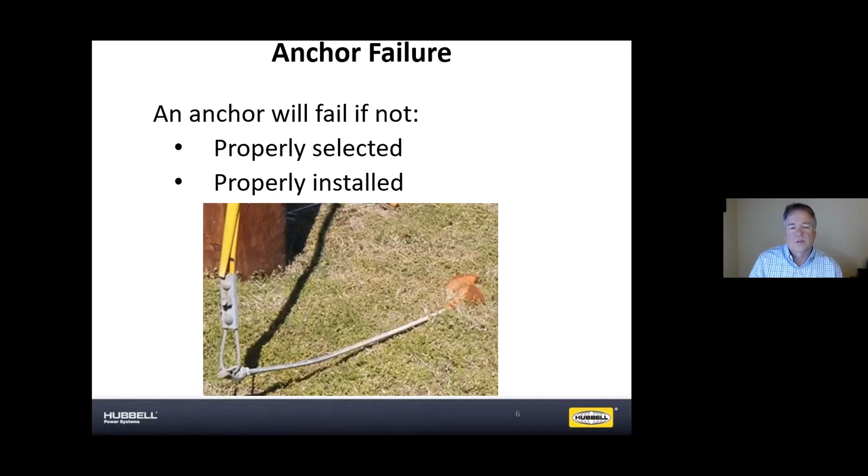All right, so the RUS standards. There are a number of different standards out there. This is the last one I've seen, and I don't think it's been changed since I last checked late last year. There are some holding capacities shown in the charts. I wanted to point out that those capacities are not the maximum the anchor is going to hold, but the design loads - what you expect to have that anchor at when the whole system's in use and in place.

So there's a couple different anchors there - an expanding anchor, the screw anchor. I'll walk through some of the different families of anchors, but I wanted to point out the note at the bottom, because this is what gets some people in trouble: it assumes these capacities are on a class 5 soil. And if you look at the RUS standards, there is a listing.

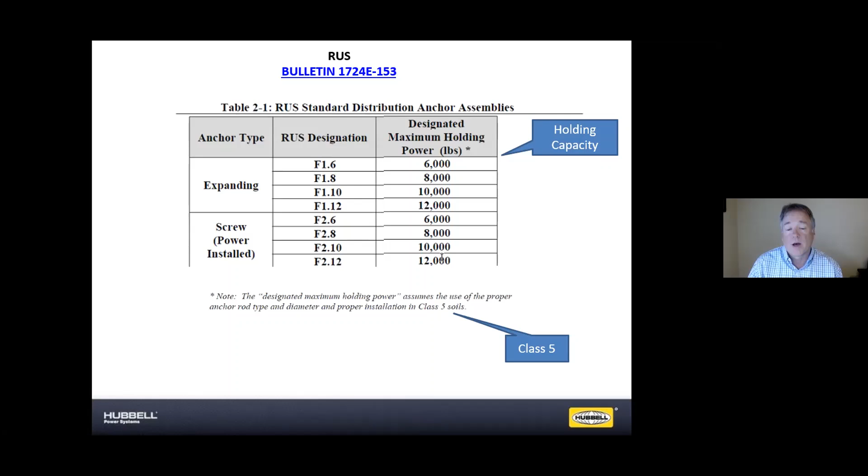Let me go back one. So you see the values here - these are the standard ratings for the different types of anchors. You can see numbers like 6,000, 8,000, 10,000, 12,000. They're asking you to derate them when you get into softer soil, so you're talking about really not a whole lot of capacity there. So there's the derating values and the soil classes.

So let me walk through some of the families here. The first family of anchors is the expanding anchor. It's been around since the 1940s - it's been a very good anchor, works well. You can see the holding capacity we show for the different size anchors. The anchors are sized based on the size of the hole they're supposed to be installed in, and most common is the 8-inch. It's by far the highest volume, and it's supposed to be installed with an 8-inch anchor auger, as we call it - a fairly short auger.

The crews I've been with would normally have their pole auger, and to install this anchor correctly they'd have a second auger that's about the size of the anchor, either 8-inch or 10-inch. We have a 10-inch on our truck.

The way they're installed is you auger the hole in line with the guy. You install the anchor, and you can see there's a cone, and underneath - a little bit harder to see - there's a base. After the anchor rod is installed through the cone and the base, you put the nut on the back side. You clip the wires that hold the base and the top together, and then the anchor is installed. Then there's a tamping bar, a busting bar as we call it, used to bust that cone out into the sides of the hole. That's where the real strength of the anchor comes from - having that hole about the same size as the anchor, having the proper size hole.

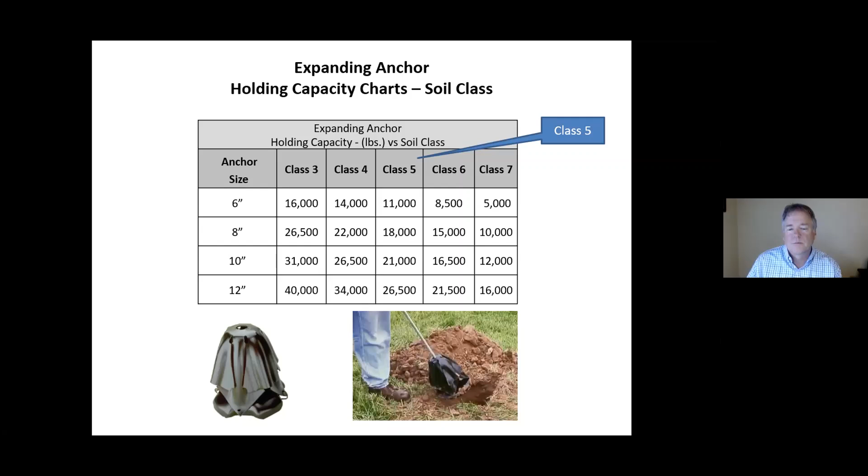So the next family of anchors I was going to talk about are the screw anchors. I'm sure most people are familiar, but I'm never quite sure who's going to be participating in a seminar. So we're talking about the type of anchors that are installed with the truck.

Some people call that the Kelly bar too. But in either case, the whole idea is to get the torque from the torque motor transmitted all the way down to the anchor, and not try to put the torque through the anchor rod itself, because the anchor rod will twist up.

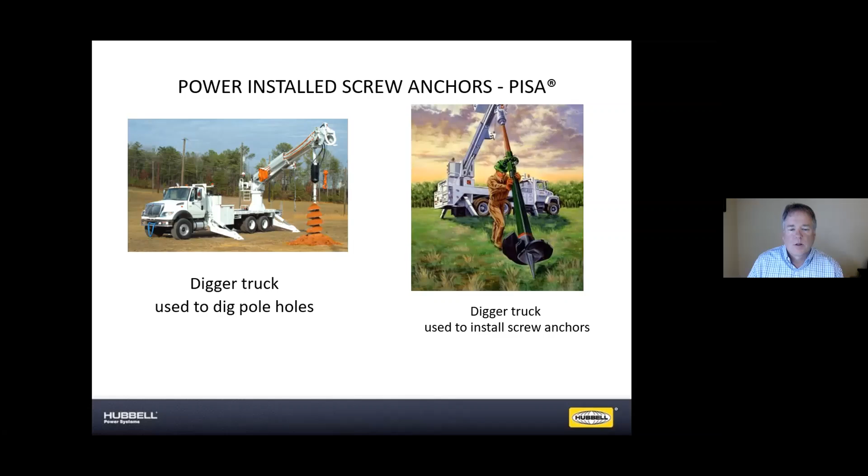When you install an anchor and the bar breaks, you know it - the crews know it, it pops. It's one of those things where if you have harder soils, some utilities are moving to the socket style. And the idea on the socket style is that...

the square wrench fits inside the socket, so there's a lot more bearing capacity from the socket onto the square bar. The torque capacity, the amount of torque the truck can put on the anchor before it breaks, is a lot higher with the socket style. They're more expensive, but it's one of those things - if the bar hub type works for you, economically it's the best. But if you're having trouble with crews hitting rocks, or even in the middle of summer when the ground's really dry, just getting through the first couple feet can be some pretty tough digging.

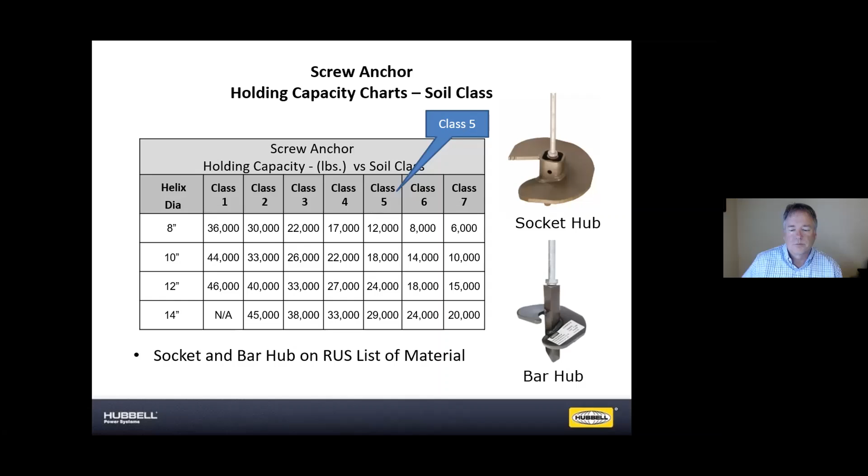The key to these screw anchors is the torque. As we talked about originally with the bust anchor, you're digging up the soil and disturbing it. The key with screw anchors is that they do not disturb the soil. You can slice them down through the top layer and get into firm soil, and the torque required to install them provides a way to measure capacity. There are indicators and tools available to measure torque.

Honestly, there's not a lot of people measuring torque for just a distribution anchor with a single helix. But when you get into the bigger anchors I'll talk about, the multi-helix anchors, it's real common for people to use a torque indicator. So I'll talk about those as well.

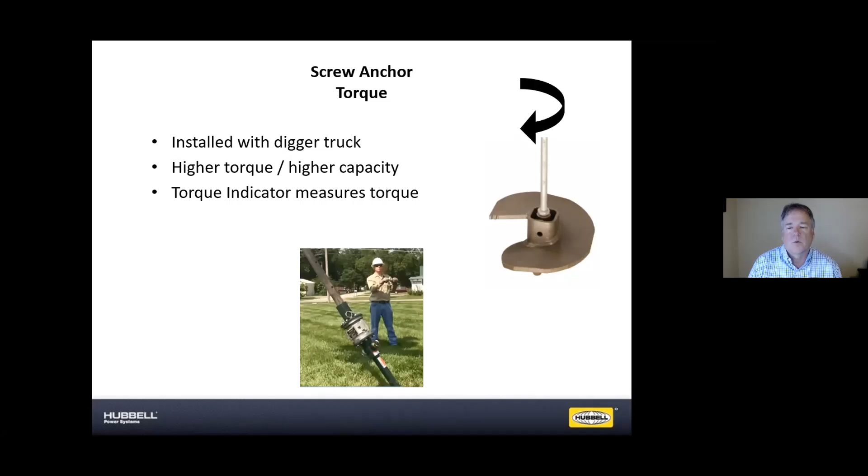Some of the things we're seeing - I've talked about the different families of screw anchors, from the bar to the socket. People are converting more and more over the years to the socket style. There is a difference in price, but when you're talking maybe $5 an anchor, consider a crew that goes out and tries to install a bar anchor and it breaks - they have issues, have to come back and get another anchor, or install a bust anchor instead. They might find it more economical to use the higher torque capacity, stronger, socket style anchor.

Anchor rods - the other thing we're seeing is more and more people going to larger diameter anchor rods. There's a 5/8 inch that's on the RUS listing, and 3/4. We sell a lot more 3/4 and 1 inch than we do the 5/8. People like the extra strength you get out of the 3/4 and 1 inch, but you also have a little bit more steel there for corrosion issues.

You may have seen over time where an anchor rod will start to corrode - it starts to pencil down. The bigger the rod, the longer it'll last. A 5/8 inch diameter is really not that large. You get a lot more steel with the 3/4 or the 1 inch.

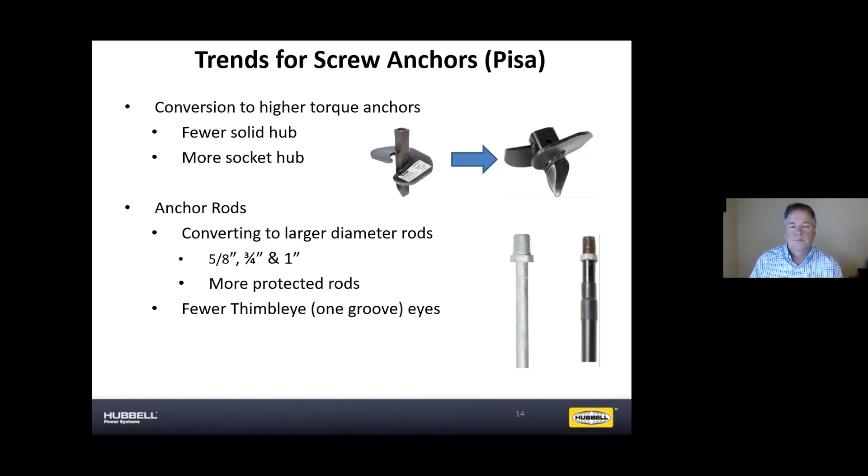The next family I want to talk about is the multi-helix. Over the years, more and more people are using these. They originally were used primarily for transmission, and they still are today, but more and more they're getting used for distribution - like a big dead end, or some kind of pole setup where you have a big dead end, or a long span, or very soft soil. I'll describe how these are installed and how they're different from the other screw anchors we're talking about.

With this family of anchors, there is no hollow tube used to install them. With the other screw anchors, the tube actually goes into the ground, and once you install that screw anchor, you have to pull the wrench out of the ground. But with this family of anchors, the torque is applied through the shaft, and the tooling never goes into the ground. There is a short drive tool, 10 inches long, that goes from your traditional tooling to hook right to the top of these anchors.

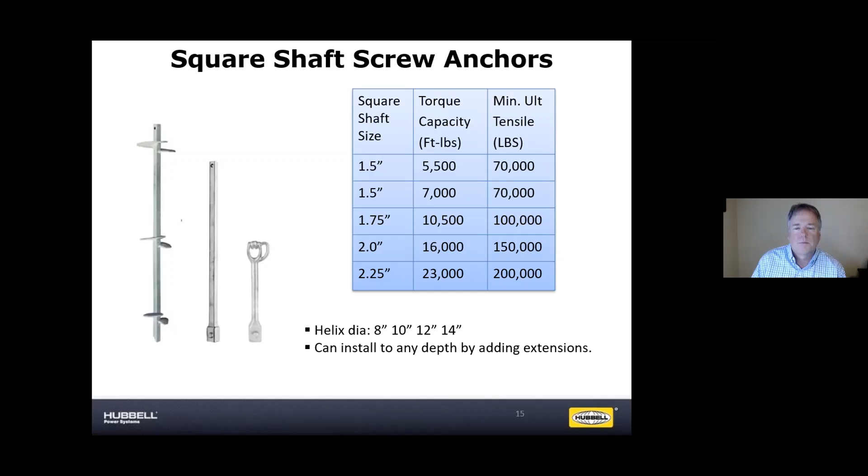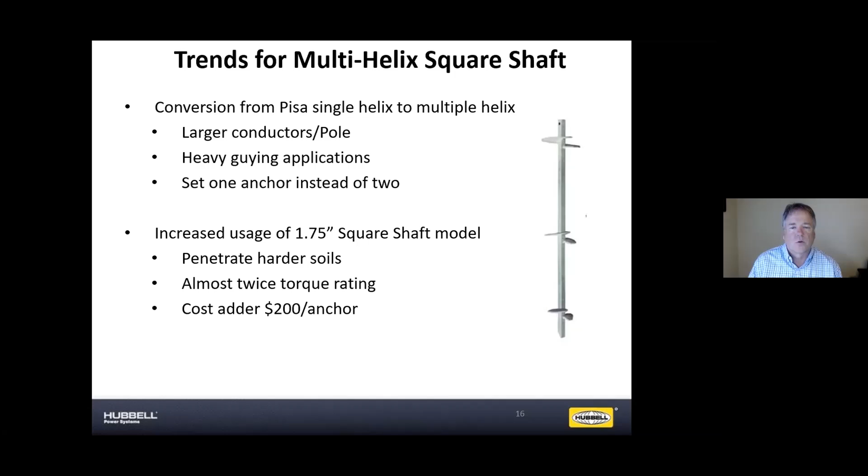It's kind of odd to think that a manufacturer would say it's okay to twist this anchor and leave some permanent twist in it, but it doesn't need to have it. That's kind of the maximum. If you know the capacity you need, it might be something less than that. But there is some twist allowed to get to the torque capacity we say is the maximum. There's some crews and supervisors that say, hey, I want to see a little bit of twist in that anchor so I know it's into something solid.

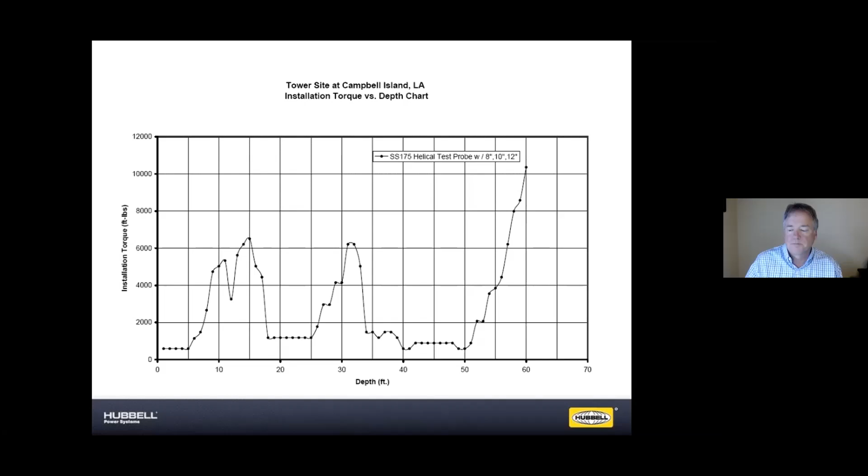All right, some anchoring tips, some things to think about when you're installing the anchor. Installing an anchor can be difficult, right? Because you don't see what's down there, as compared to framing up a pole or something.

And one of the things that we ask you to look for is water tables. So if you're in an area where you do have a water table, it can reduce the capacity up to 50%. That's quite a bit, and it kind of depends on the type of soil, whether it's sandy or silty or whatever. But just be aware that changing water tables can have an impact.

If you install it while there's water there, it will have less torque, and you can kind of pick up that it's a softer soil. But if it's some unusual situation where the water table changes a lot and maybe moves a couple feet or something like that, it could have an impact. Maybe down in a creek bottom, river bottom or something.

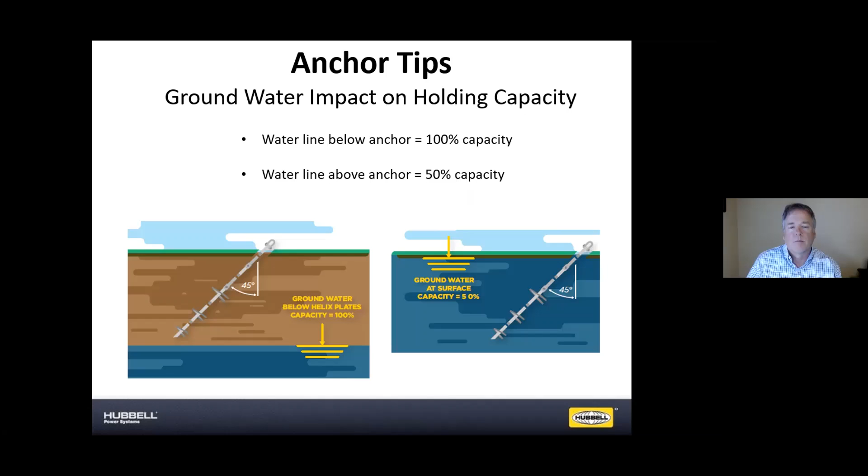The other thing is the depth. We want to make sure that, let's say, a single helix type anchor that's installed, or a bust anchor, is about 5 feet in depth vertically.

The best way I describe it, the way you can think of it is, imagine screwing a single helix anchor into the ground. You install it a foot or two, and you pull up on the boom, and the whole soil above it kind of comes up and busts through the surface, and you don't have much capacity. The capacity of the anchor when it's installed at 5 feet is different.

It doesn't pull the soil up and doesn't disturb the surface. It's basically shearing the soil, like you'd almost break through steel or something, different than interacting with the ground level. And so the recommendation is 5 feet. If you get shorter, we don't really have like a derating factor, but it does have an impact.

And you can imagine too, if it gets shallower, you get a lot of rain during the spring or something like that, and you get water down there, it can impact it as well. So make sure you get the depth on the anchors to get the capacity that you need.

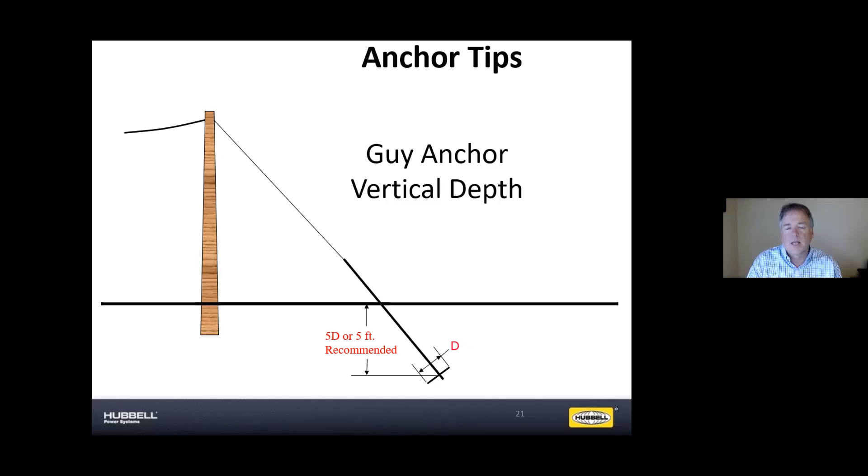Spacing, I'm sure you have your own spacing requirements. You got people out staking it, but there's always issues. You got limited space, you got limited right of way. For two anchors to act independently of one another, they need to be about 5 feet apart. That's kind of the rule of thumb. It's not always able to be done, right?

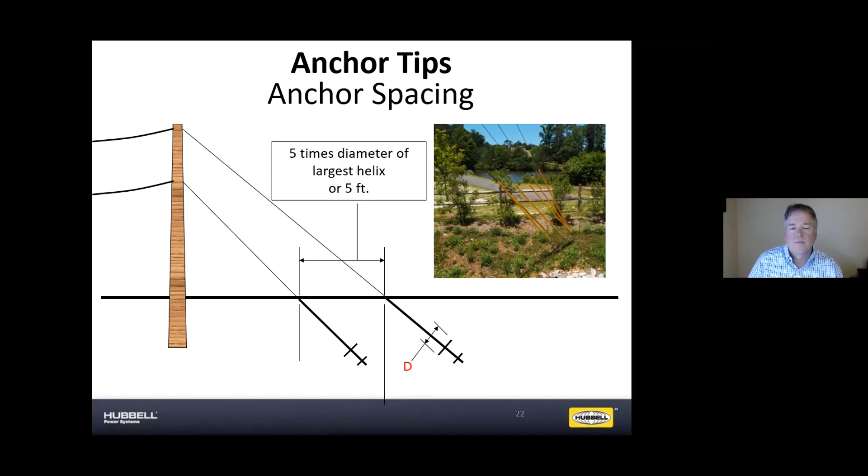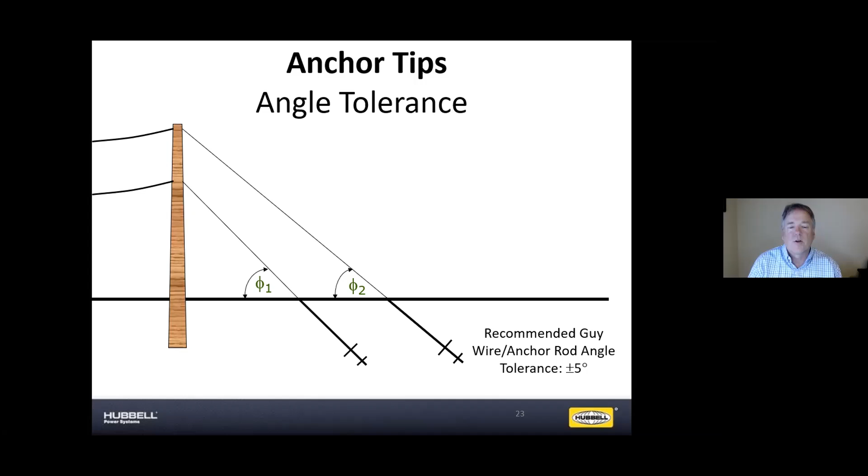So installing them, they should be installed in line with the guy. Our recommendation is plus or minus 5 degrees, which is very tough to do. Not always done that way, but the better you can line them up with the guy, the better off the anchor is. I think I have some images.

Yeah. So worst case, if somebody were to install one straight up and down, you can picture that 3/4 inch rod or whatever eventually bending and pulling through the soil, and your pole is leaning, and you can have all kinds of issues that you don't want. So the better you can line them up, the better the situation.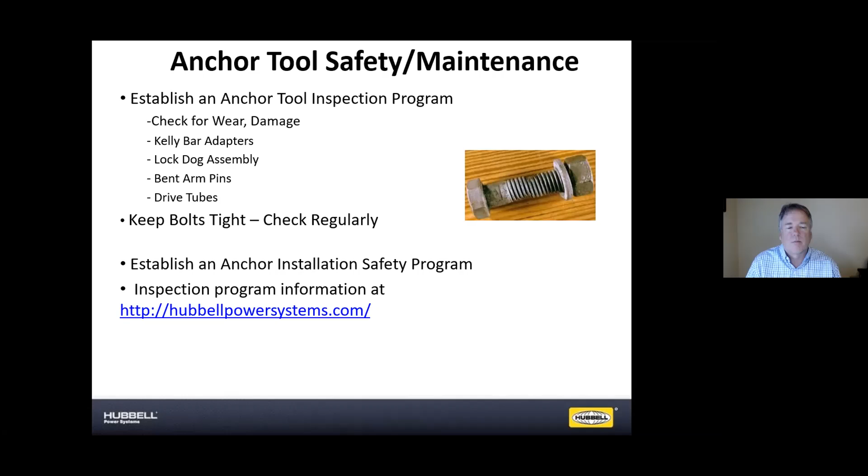The other thing we've seen is that the Kelly bar adapter that attaches to the torque motor drive shaft, we do supply a special pin with all our tools. If crews don't like them and want to use a bolt and nut instead, we've had situations where people have gotten hurt because the bolt has flown out, whether they didn't put the nut on or the nut vibrates off. The safest scenario is using this bent arm and this coil lock.

If you've been around an anchor installed in harder soils, you get a lot of chatter and acceleration, the anchor stops and starts repeatedly, and crews do what they can to get it in. If they hit something solid, the pin can come flying out if they're using a bolt. One of the worst situations is using a click pin, like you might use on a tractor or lawn tractor just to hold the pin in place, but those click pins open up and come flying out.

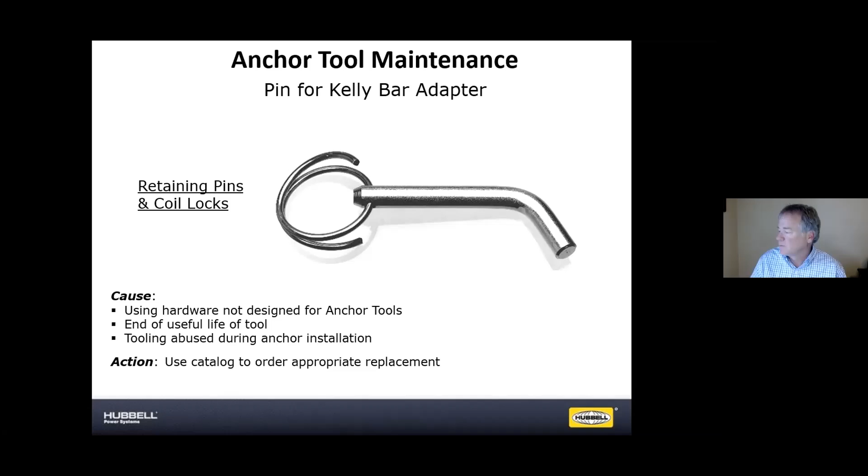Checking the time, just about ready to wrap up here. We do have a checklist if you have concerns about your tooling, what to look for, and how often you should be checking it. That checklist is on our website, and we can get you copies. It gives you recommendations on what to look for too.

Just the last couple of slides, I wanted to point out that we make other things besides guy anchors. We make pipe screw-in foundations that are used under transmission towers and substations. You can see the image in the lower left, a solar field where the helical piles are put in.

That one had the requirement of looking at the whole cost of the project, even after its life, how much it was going to cost to take the concrete out, and whether the concrete would go into a landfill or not. These screw anchors were installed at the end of the project, and they plan on unscrewing them and throwing them into a recycle bin. So all that can come into play.

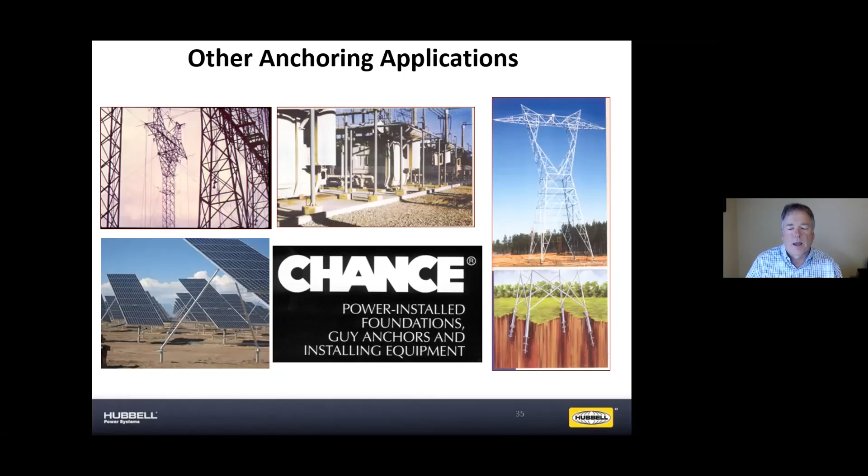We also do this for new construction and substations as well. You can see some of the different ways - sometimes the tower is connected right to a pipe. On the right, some substations are hooked to bigger pipes directly. The lower left shows a common setup where helical piles act as the deep foundation, or footings, tied into a cap at the top. And on the right is a transmission tower where they use smaller helical piles, and we make a grillage, like a base-type system, that ties the helical piles into the tower.

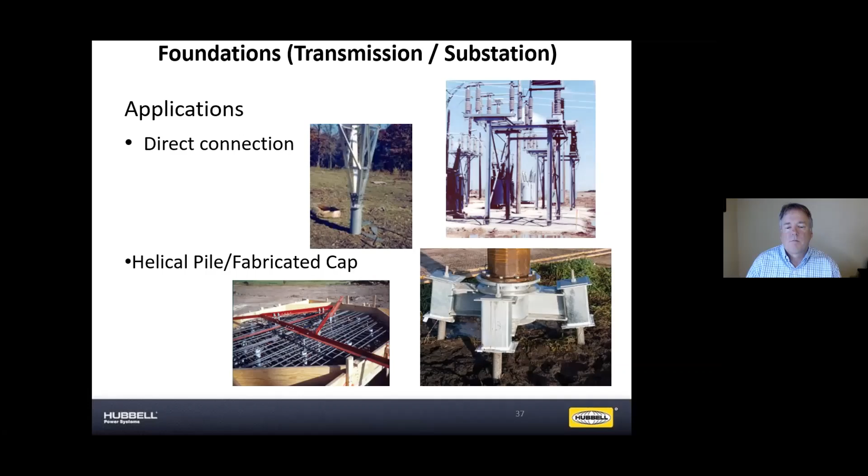Again, wrapping things up, we do have an anchor encyclopedia. It's online, and we can get you copies if you need them. Just let us know, and we'll get those sent out to you.

If you ever have a project with soil information, maybe from soil borings at a nearby substation or something like that, you can send it to us along with your loads for the guy structures, and we can give you a free anchor recommendation on what you should use. In a lot of cases, people have an ongoing project and find soils they weren't expecting, and they need recommendations, so we do that as well.

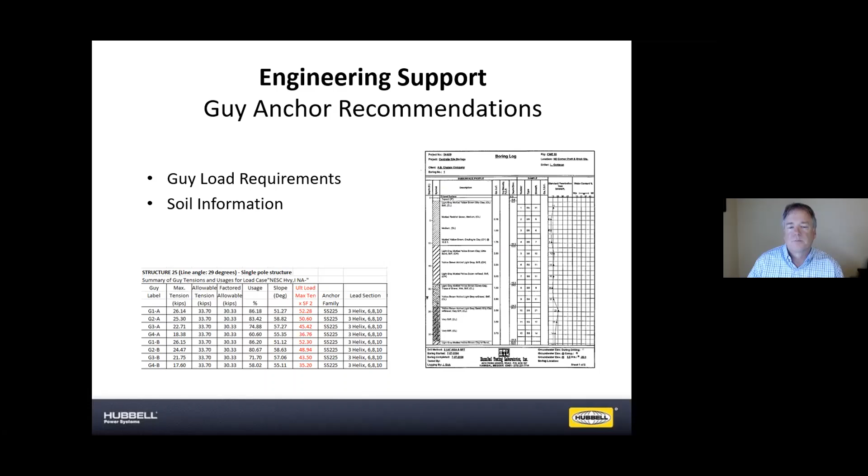We also do training seminars. We used to do them in person, and last year we did them as webinars, but we'll be back to doing them in person, whether this year or next year. If you're interested in coming to see the factory, see some anchors put in the field, we do some pull testing and walk through all of it. So if you have interest, let us know.

All right, so I think that's my last slide.